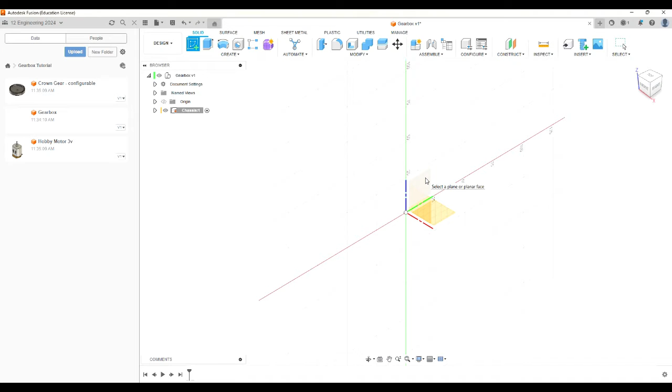Okay, I'm going to start by drawing a sketch. I'm going to draw the side wall that the axles go through. So by clicking on Create Sketch, I'm going to choose this plane here, that's the one that's going to have the side wall on it. And I'm going to start by drawing a sketch.

Now, I want to put the axle holes in, but I've got to know how to space them. So to do that, I'm going to use some construction lines. I'm going to create a circle - I can click on circle here, or C for circle, and I can put this any old place I like. And now what diameter?

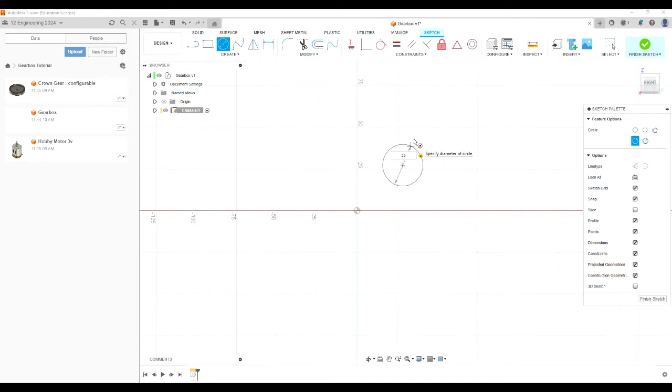The compound gears that I'm using have 50 teeth, and the modulus is 0.5. The 0.5 is the ratio between the number of teeth and the pitch diameter. So if I've got 50 teeth and 0.5 modulus, that means my pitch diameter will be 25 - that's 0.5 times 50, 25 millimeters. So that is the pitch diameter of the large wheel on my compound gear. Now that needs to mesh with another gear - it needs to mesh with the small gear on another compound gear.

And the small gear has got 10 teeth and it's still 0.5 modulus, so all of the gears that we're using have 0.5 modulus. So it's got 10 teeth, which means it's going to have a pitch diameter of 5 millimeters. So I'm going to type 5 as my diameter.

I'm going to zoom in and just grab that and move it out a little bit, just so it's a little easier to read. Now, that pitch diameter and that pitch diameter, they need to be touching. So I can come up here and use a constraint. I'm going to use a tangent constraint. If I click here and click here and here, that now connects those two circles.

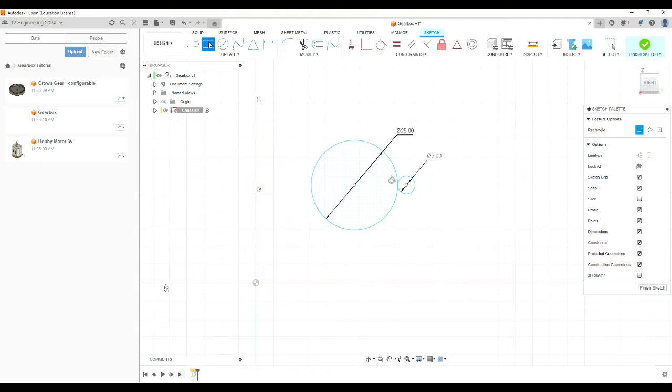Now I'm going to draw the actual rectangle. I'll click on the rectangle tool, and this will be the outline of the side of my box. So let's just draw a rectangle like that for now.

Now you notice all these lines I've drawn so far are blue, and blue means they're not fully constrained yet. So we're going to go about doing that. We're going to position these exactly where we want them. So let's think about some constraints.

I want this axle hole and this axle hole to be exactly horizontally aligned. They look like they already are, but I haven't actually constrained them that way. You might see if I grab this one, I can move it anywhere on the tangent of that one there, because that's the only constraint I put in.

So let's put a horizontal constraint between that circle's center and that center. If I come up here and click on that one... hang on, let me just escape or click somewhere else. Click on that constraint there, and I'm going to click in the center there and on the center of that, and now it's made them constrained horizontally. They're both at the same height.

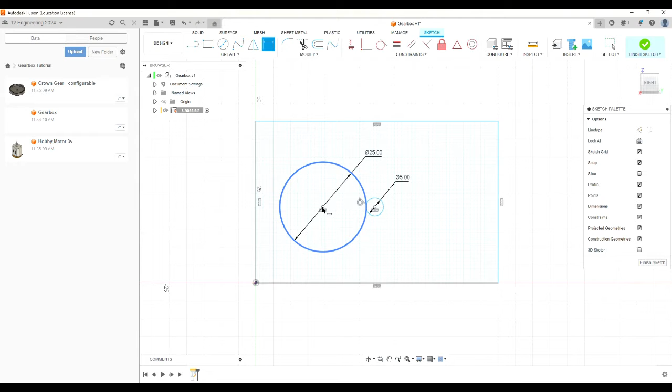Now escape, because I've finished with that function, and I can still move that around, so I need to fix it in space somehow. So I'm going to use a dimension. Click on dimension here, and escape, then click on dimension again, and click on that center there and that origin there. So I want that distance.

What do I reckon? Let's try a few things. What if I do 18? 18 looks pretty good. Might even go a bit smaller than that. What if I go 15? Because I don't want to use more plastic in my 3D print than necessary. So let's make it nice and compact.

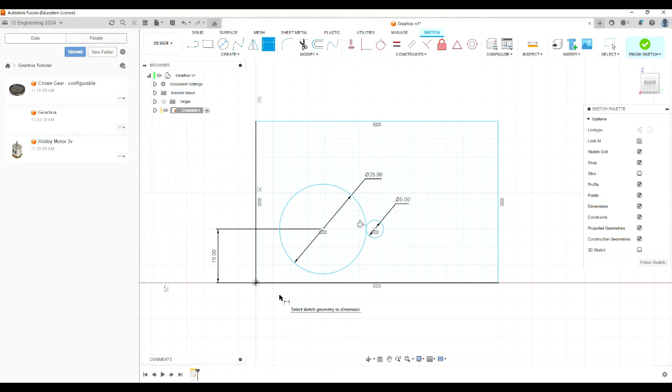Okay, I'm going to click from that origin there. See, I've still got my dimension active. You can see if I've ever got a tool active, I can escape to go back to just my select tool, and when I click on the tool, you can see when it's active by the cursor.

So from the origin there to the center of that point there, this time I'll come down here and do a horizontal constraint or a horizontal dimension. And what if I make that 15 as well? That looks pretty reasonable. Can you see now these have gone black? That's because they're fully constrained.

Now these lines over here, they're not fully constrained, but if I put some dimensions in - that's 70 at the moment, I'm thinking, what if I try 40? How does that look? Yeah, I can go even smaller than that, I think. Double click there, 35. Yeah, that'll do. Again, I don't want to use more plastic than I have to in my 3D printer.

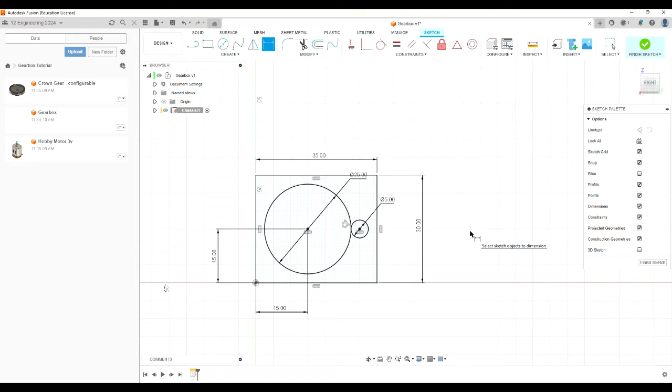Now I'm going to click on that line there and come out here, and I'm going to constrain that as well, or dimension that. I'm going to make that - what if I try 30? Yeah, I can go less than that actually. I can go 25. Good, okay. Now, because this side here can actually be smaller than that gear, it doesn't matter if the gear sticks out the top a little bit.

All right, escape. Now, another thing I'm going to do is these lines here, those two circles, they're really only construction lines. I'm not actually going to make anything from that circle, but I used the circle to help me do construction. So I'm going to click on that circle there, hold down Control and click on that circle, so they're both selected. I can come over here and turn them into construction lines by clicking there, or I can use X on my keyboard. Now you can see they're dotted, so they're construction lines, because I'm not actually going to make them into anything - I just use those lines to position my axle holes.

All right, so now I know where my axle holes need to go. They need to go there and there. Now what I'm going to do is, I could just go circle and create my axle hole.

Now, what's the diameter of my axle hole? My axles are 2 millimeters, but I need a little bit more than that because I want my axles to spin freely. Also, when I 3D print, holes usually end up a little bit smaller than you define them, because the plastic squishes out a little when printing. So the actual size is going to be a bit of trial and error. I think it's going to be about 2.3 millimeters, but I'm not sure.

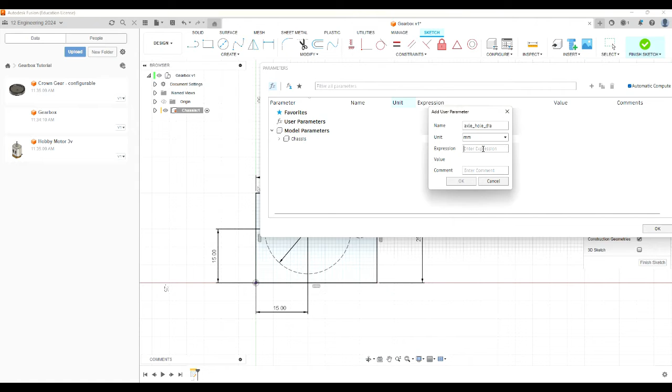I'm going to go okay there. I'm going to make all of my axle holes equal to that parameter, and by doing that, if I change that parameter once, all of my axle holes will change automatically, which would be really good. So anything you think you might have to change, with multiple instances of that measurement, a parameter is not a bad idea.

So I'm going to click on dimension, then click on the circle, and click out here. Hang on, I've got to delete the old dimension first. Okay, now put a new dimension in like that.

Instead of 2.3, I'm going to type axle, start typing axle hole diameter. There it is, I can see it. Click there once, hit enter, and there we go. So that axle hole now shows FX, which means it's calculated from the parameter.

All right, I'm going to do another circle. So C for circle. I want another circle here, and this one here, AX... yep, there we go, axle hole diameter, and click enter like that.

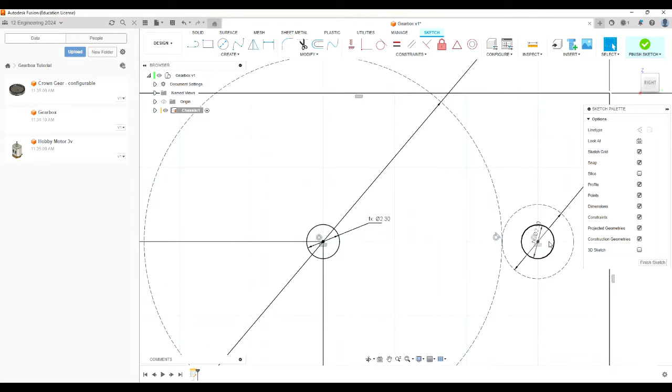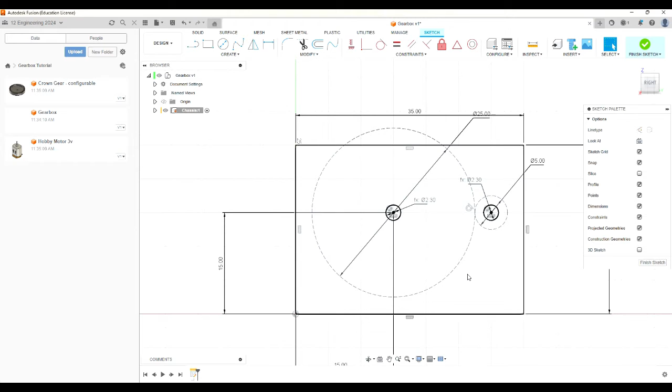Again, if I zoom right in, grab that dimension and move it somewhere so it's not so crowded in there. As I'm zooming, I'm using my mouse wheel, so if you've got a laptop, you can pinch on your trackpad, but it's much easier to use Fusion with a mouse with a wheel. By moving my cursor over here and zooming in or out, you can see I can easily move and zoom using the mouse wheel.

So if you haven't got one, get yourself a mouse with a wheel. You can also use this pan tool here, or pinch on your laptop. So you can do it with a laptop, but it's easier with a mouse. All right, escape to get back to our normal mode.

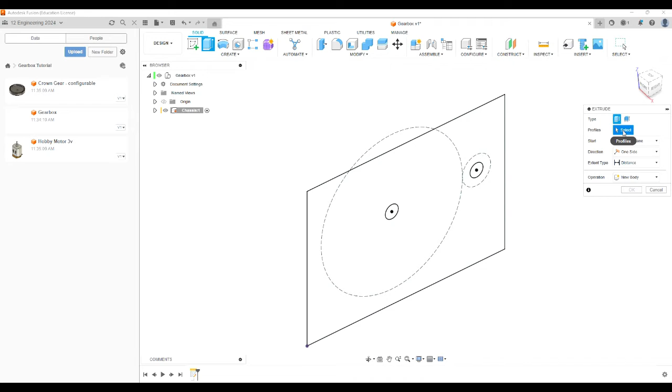Okay, that took a while, didn't it? Let's finish that sketch. Now I'm going to extrude it. If I come up to my view cube and view around, I can see that's just a two-dimensional sketch. I need to make that three-dimensional, so I'm going to use the extrude function, or just hit E on my keyboard. It's going to ask what profiles I want to extrude. Well, that profile there. I could actually select the holes, but I don't want to because I want to leave them as holes. So let me get rid of all that selection. Select that. That's all I want to do, okay?

And this arrow here, I can drag it, and you can see I can now turn that 2D sketch into a 3D shape. I want it to be 3 millimeters, so I could drag it, or better still, I could just type 3 millimeters into there, press enter, and there we go. That's created a 3D body.

If I come up here under chassis, and I open up the twisty there under bodies, that's the body that I just created. So my component is the chassis, and my chassis has one body.

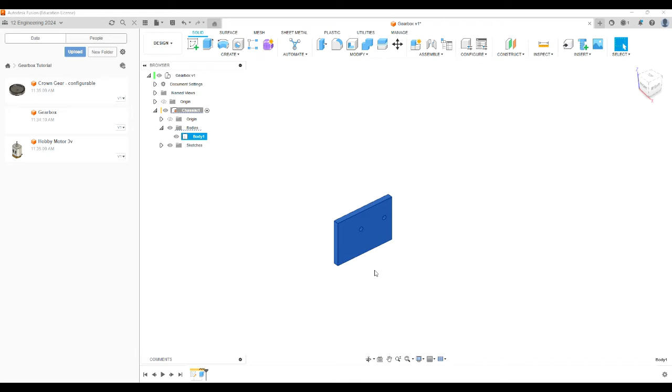What I want to do now is create another identical body over this side. So I'm going to use this move copy command, or M on the keyboard, and you've got to be careful what you're copying. I don't want to copy the whole component, I don't want another chassis, but I want another body inside my chassis. So I'm going to copy a body, making a copy rather than a move. If I didn't do that, it would just move it, but I want to create a copy.

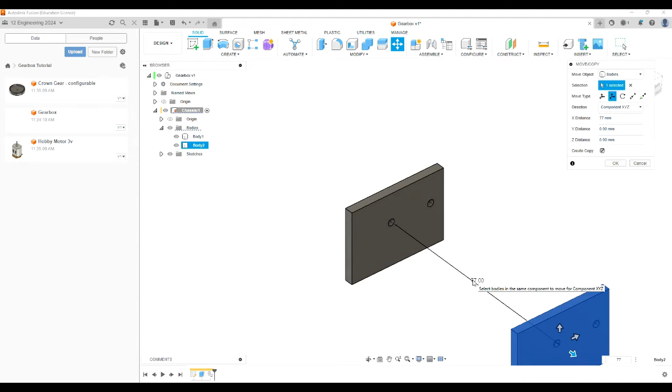There's different types of moves here. We're just going to use a translate move, and I'm going to grab that arrow there and move it. Now I want it 77 millimeters. The reason I want 77 is from that edge to that edge, if that's 77, then to that edge is 80, and I've got a 100 millimeter long axle. So I want 10 millimeters sticking out this side and 10 millimeters sticking out that side. So I'm going to go 77. Hit enter there, or OK.

Now you can see I've got two bodies. That's one body, that's another body. In a minute we'll join those bodies to make them one body again. In fact, let's do that now. So I'm going to grab my view cube and drag it round so I can see the bottom of those bodies.

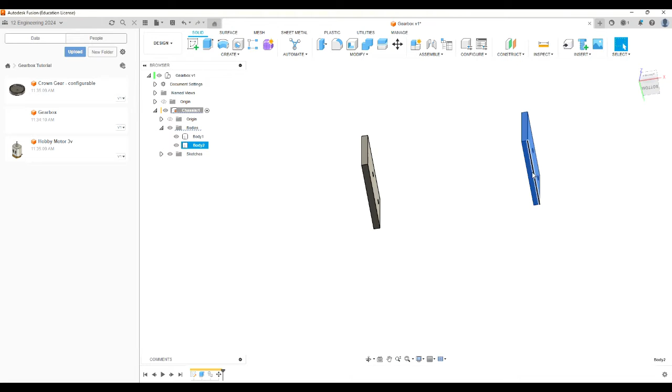And I'm going to start a sketch, and put a sketch on the bottom of one of those bodies, on that plane actually. So now I'm going to choose rectangle, or R on the keyboard, and draw a rectangle from that corner there to that corner there, like that. I could finish the sketch, but I'm just going to use E for extrude, and that will automatically finish the sketch and start the extrude.

Let's just drag a bit so I can see what's going on. This is looking up from the bottom. So what do I want to extrude? I want to extrude that profile there. And look at this, it's actually, for some reason I'm not sure why, divided that into two sections. So I want to extrude that, but I also want to extrude that, so I'm going to select that as well.

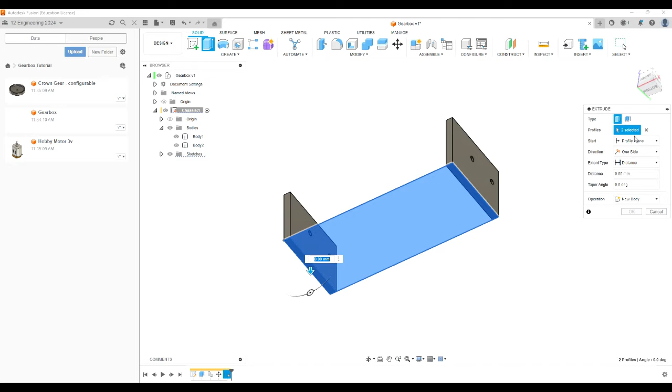So with both of those profiles selected, I'm going to drag that down by, oh yeah, that's right, that direction, again by 3 millimeters, because 3 millimeters is a pretty good width for a small 3D printed component. Alright, and look at that, now my bodies have been joined together.

Actually, let me just go back into that extrude. This is our timeline down here, so you can see all the steps I've taken. Let's double click on that last step, that extrude, and I can go back in just to make sure I did it correctly. I did, so it was an extrude. There's different extrudes - you can join things with an extrude, or cut holes with an extrude, or do intersections, or create new bodies. I don't want to create a new body, so join was the right thing. When you do that extrude, make sure it's a join.

So in that, because it's a join, it joined all those bodies together into one body. Alright, so there we go. About time to save, I think. Now, you know what, that's my start - that's the start of the chassis.

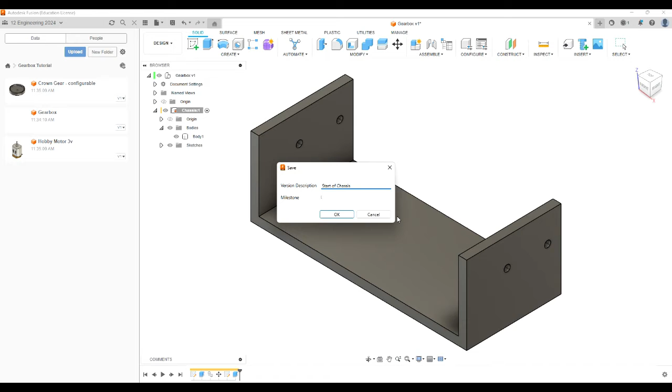So you can put a description on each save that you do, because you can actually go back. Fusion does version control automatically for you. So, start of chassis. If I click over here, once that's done, once it stops whizzing, if I click on V1 here, it will show me - I clicked too early, there we go. See, it gives me that's when I first created the item, there was nothing, this is this point here. So I can actually go back to any save point I want, and put little descriptions on my save points, which is pretty handy.

All right, let's create an axle. I'm going to come back up to Gearbox, up to my top level, because what I can do is create an axle component underneath the chassis component. I could nest it.

You might argue that's a good idea, but this is a fairly simple mechanism, so I'm going to keep all of my major components at the top level. That's why I activated the top level component - you can activate a component by clicking the circle next to it. If I activate the top level, then when I create a new component, it'll sit underneath Gearbox v2 at the same level as the chassis, not nested inside it.

So I'm going to create a new component here and call it an axle. I want two axles, but let's start with one, then I can copy it to make another. There's my axle component - it's automatically been activated, sitting at the same level side by side with chassis, not underneath chassis.

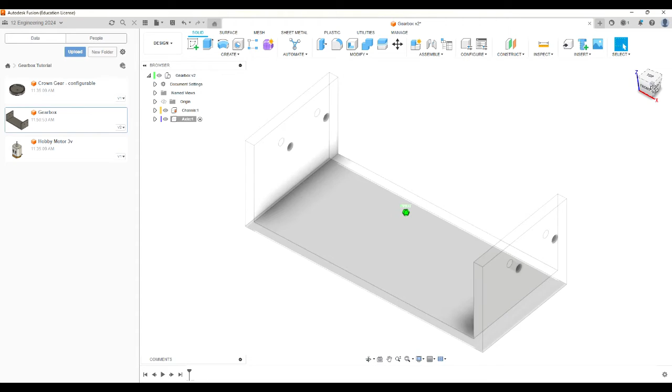I'm going to drag around to the side here and start my axle from there. I'll draw a sketch and create a circle. This circle needs to be 2 millimeters because my axle is 2 millimeters diameter, and you can see it's just smaller than my hole, which is good - that's what I want.

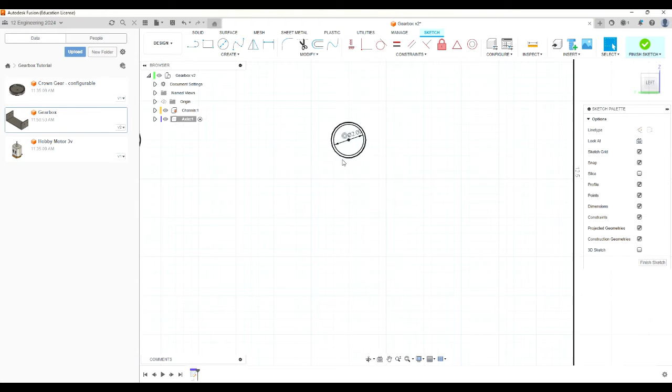Okay, I'm going to extrude that. E for extrude, click on that circle. Let's zoom out a bit so I can see what I'm doing.

Now, I want my extrusion to be 2 sides because I want to go back this way by 10 millimeters - see that 10 there? And I want to come out this way by 90 millimeters because my axles are 100 millimeters long - 10 millimeters out that side and 10 millimeters out the other side. My operation type is a new body, which is good because I want to put a body under my component.

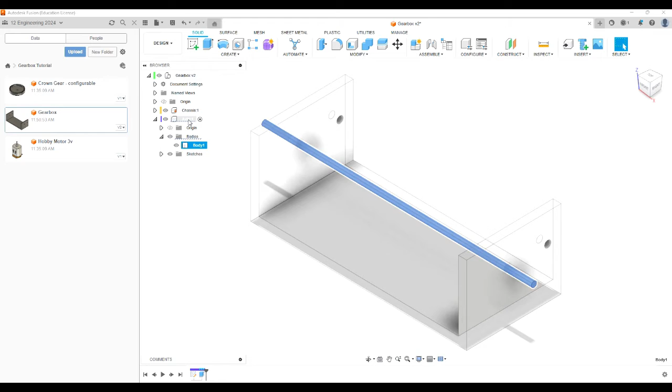So there's my axle now, and my axle has a body. I could name that axle if I wanted to, but I think just naming the components is going to be enough at this stage.

All right, now I want to copy that. When I copy it, I can't copy it if it's activated, so I need to come back up to the top level. Now I can copy that component. I'm going to click on the move copy command, or I could use M.

Last time I did a copy, I copied bodies - this time I want to copy components. I want to take that whole axle component and make another component. So I'm going to select that one, create a copy, and do a point-to-point move. Actually, once I've clicked point-to-point, I've got to go create copy again.

So point-to-point means I've got to take an origin point. Let's click select and select the center of that point there. And my target point, I want it to be there. So that's created a copy, and it's copied it there.

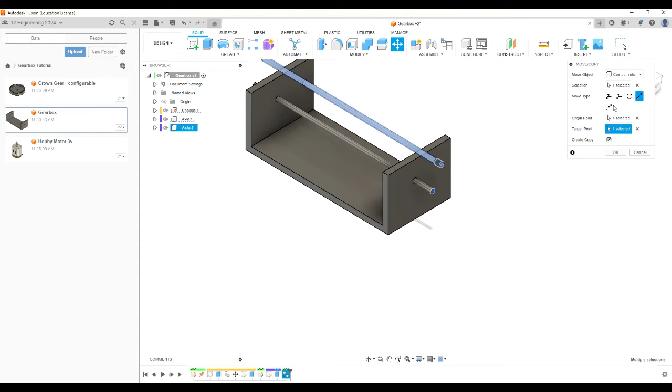Now, it's not quite right, is it? It's sort of been translated back. So I'm just going to finish by clicking translate, grab this arrow, and drag it back out there, 10 mils. I don't need to create copy again because I already created a copy when I did the point-to-point action - now I'm just translating the copy that's already been created, so I don't want another copy.

So now you can see I've got axle 1 and axle 2. They're actually the same design, but if I made a change, if I made this one longer, this one also would be longer because they're 2 separate instances of the same axle, which is pretty much what I want.

All right, so where are we? Okay, the next - actually, let's save it. Save, and let's call that axles in place.

Okay, now talking about axles in place, those axles now, I could actually move. Let's just Control Z because I don't want to do that. I actually want to put those in place. I want to join them. I want to create a joint between the axle and the chassis.

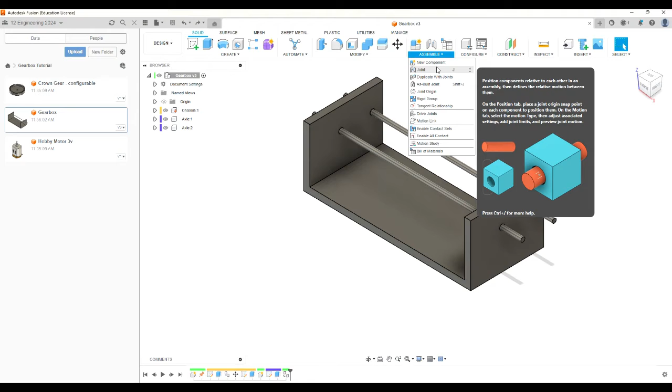Now the axles and the chassis are already in the correct position. So if we look at assemble here, there are 2 types of joints: a joint or an as-built joint. I'm going to use an as-built joint because they're already in the right position. If they weren't in the right position, I could use joint, and while I create it, I could have them move into place, but sometimes it's easier to just create them in place and use an as-built joint.

So if I look under assemble, as-built joint is Shift J and joint is just J. So I'm going to press Shift J to create an as-built joint. What you do is pick the component that's sort of like the minor, smaller component, because if we're doing an as-built joint, none of them will move. But if we were doing a normal joint, the object you click first will move to the object you click second. So I'm going to click that as my first, and I'm going to then choose that as my second.

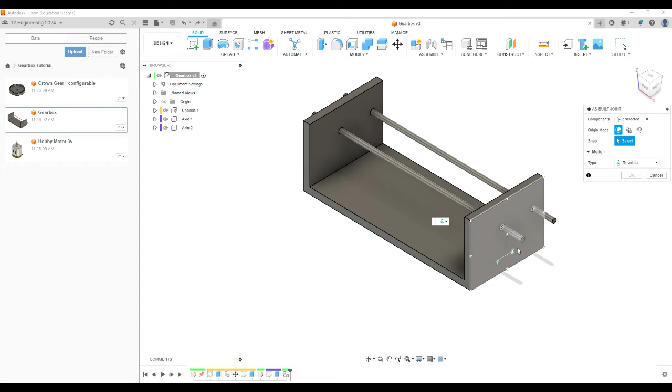And there's different types of joints. We could do a rigid joint, which would mean no motion at all, but I actually want a revolute joint because I want this axle to be able to rotate inside the joint. Which means I've got to select this. I've got to choose a snap position - in other words, what's the axis of rotation?

So I click on select there, let's zoom in, and I want to choose - be careful not to choose the edge - the center of that axle. Now you can see it's animating. It's showing me that if I click preview motion, you can't see it much because there's no features on the axle, but that axle can rotate inside the joint we've just created. So click OK there, and that's a joint - you can see that up here.

Joint there. All right, let's look at this one here. Let's do the same thing. We're going to go Shift J to create a joint. I want to join that axle to that chassis, so they're selected. I want it to be a revolute joint, and I need to select the axis of rotation, which is that one there, and then I can go OK, and I'm done.

So now they're joined. So now I can't grab and move those axles. They're in place, which is good, because if I move this chassis at some stage, or move some other components, these aren't going to go and play up on me. All right, let's see, what else do I need to do?

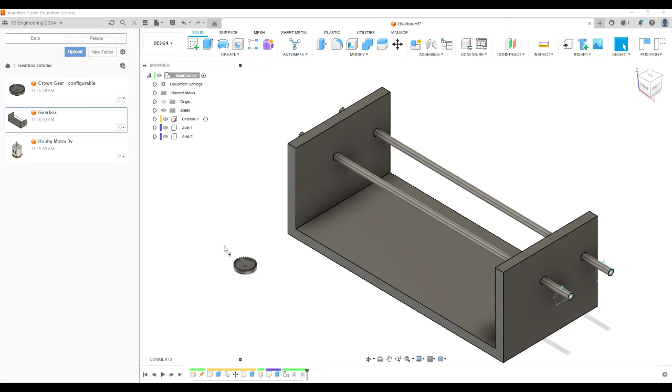Okay, what I want to do now is put my crown gear in place. So here's my crown gear. I'm just going to grab my crown gear and drag and drop it into my design, and it'll automatically put it at the origin of the design.

Now, actually, let me just Control Z. Let me show you, I needed to be careful of this. When I put my crown gear in, I want to have my top level design selected so that my crown gear as a component sits directly under the top level - on the same level as all of these guys. Now I'm just going to grab this and move it out here a bit so I can see it better. And I'm just going to go OK.

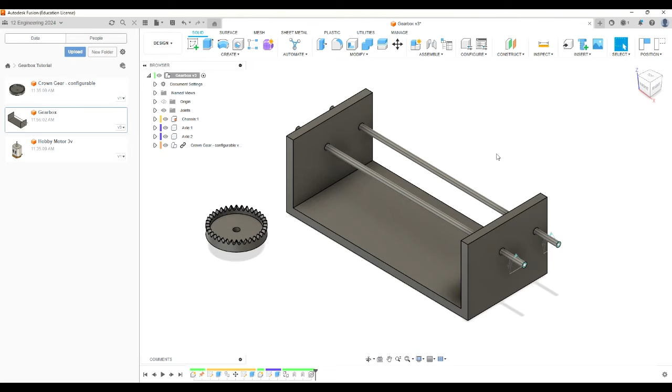Now, I want to put that crown gear onto that axle. So let's do a joint. I could move it there first and do an as-built joint, but let's just try doing a straight old joint. So again, with Gearbox selected up here, I want to now press J, and OK.

So component 1 - actually it gives me component 1 and component 2 now. So component 1 is this guy here, and in fact I'm just going to select that point there. Oh, actually, yeah, that's all right. Okay, let me show you again.

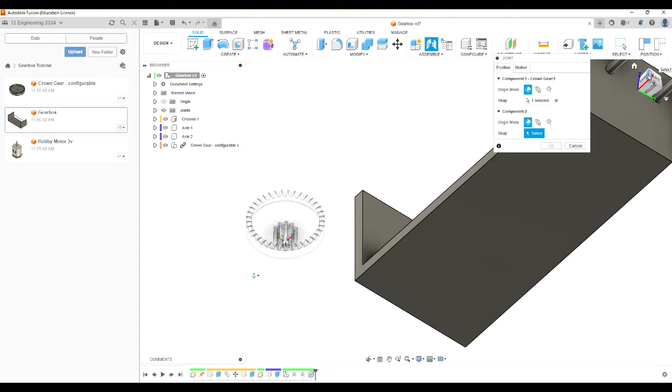So component 1, it's asking for my snap point. So when I select component 1, I'm going to say that center of that hole there is the bit I want to align with something. So I'm going to click there on that center hole, and for component 2, let me just move around a little bit. I want to snap that point there onto this axle here, like that.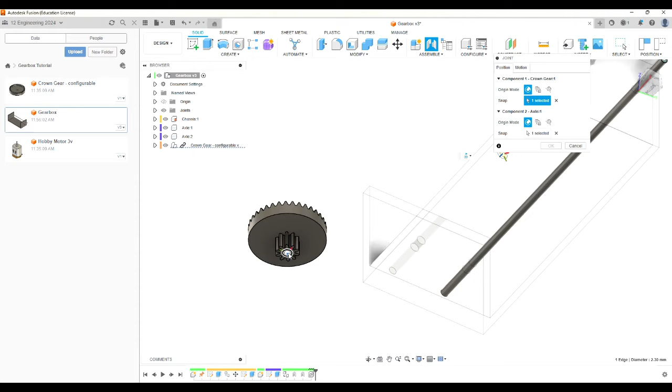Okay, and it wants this, let's see - oh no, it wants the snap point. See how that's white? Oh, actually that looks all right. Let me just do that again. Selected, snap point - there we go, that's got it. So now you can see it's come in here, and let me just have a look at the orientation.

Okay, that orientation is incorrect. I want those teeth on the other side, so I can use flip. It took a guess and got it wrong, so I click on flip and now it's right.

I can move this up this end a little bit. Now, what kind of joint? I want this to be a revolute joint as well. Okay, so that's good, I can go okay, and there we go. That's joined in there, and I can now rotate that by hand, just freely, anytime I want.

I'm going to just revert back to its original position. Okay, good. Let's save it again. Save. Let's call that crown gear in place.

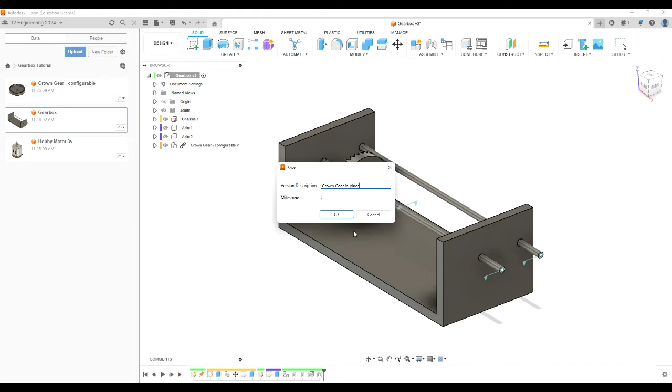Okay, now I'm ready to put my motor in. So let's do that. Now you've noticed I haven't put a mount for the motor yet. I'm going to build the mount around the motor. So let's get my motor and drag it in like that.

Again, it'll put it at the origin here, and I'm just going to move it out of the way so I can see it. Now, when I've got it in a spot that I can see it, the first thing I want to do is orient it correctly. So that's the bottom of my motor and that's the top with the terminals on it.

So the first thing I'm going to do is, see these circles? These circles allow you to rotate. So I'm going to grab this top one and rotate. Now I'm going to be careful about how many degrees I rotate it. So if I grab that and rotate to 90 degrees, you can see there it says 90 degrees. So that's good, the bottom's down now, so that's good.

Now I want that axle there facing this way, so I'm going to grab this handle here. I'm going to rotate it this way by 180 degrees, like that. Okay, and all right, that'll do me for now. Oh, actually, no, I'll keep going.

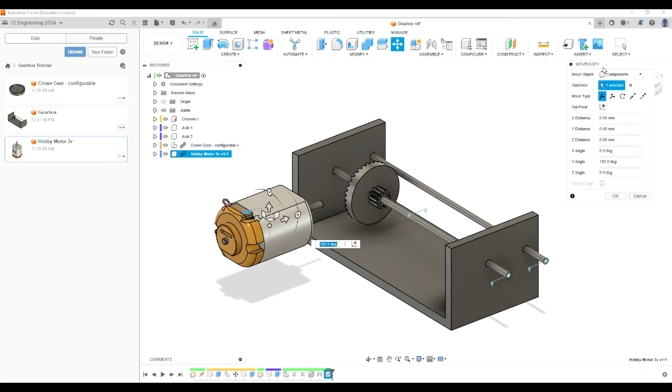I'll keep going. Now, what I also want is if I look at the height of the motor, it's not quite at the right height. I want that axle there to be aligned with that axle there. So what I'm going to do is a point-to-point move here.

So I'm going to select that center point there, that's my origin point, that center point there, like that. And that's in the way. And that center point there. I'm actually clicking on the outside of the circle to get the center point, but you can see it's got the center point, so that's good.

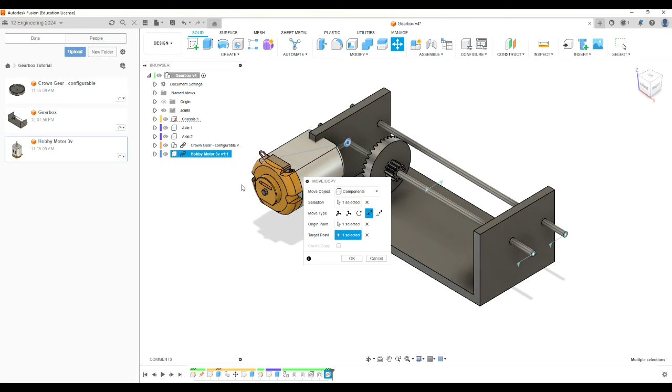All right, now you might think, oh, what did that do? That sort of that's aligned. Not so -- you can see now my orientation is correct, my height is correct. So the other bits to fix now are pretty easy.

I can move. Let's see. I'm going to do a translate. So I'm going to grab that there and move that across to here. Let's have a look at the top view, see what that looks like. Okay, and this needs to move back a bit. Now I want that to be about there.

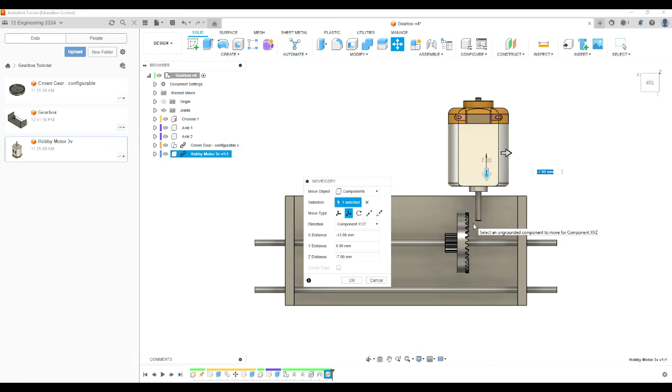Now you know what, I should have put the pinion on first and then I can see where it goes. So I'll just move this out here a little bit. I'm going to put the pinion on and then I'll know exactly where to put it. So we'll leave it there for now because that's lined up.

It's got the right orientation, it's got the right height. We'll just fix this other motion in a moment. So, okay, all right, let's do the pinion.

So I'm going to create a sketch. Well, actually, no, I can't -- I don't want to do a sketch. Ignore that. What I want to do is create a gear.

Now, to create a gear, I'm going to use a utility, an add-in. So utilities, add-ins, scripts and add-ins. I'm going to come down here and use this spur gear. I'm going to use this bottom one with the Python symbol and click on run. And this runs a little script that some helpful person has created, which will do all the hard work to create a gear for us.

So my pinion gear has 10 teeth. Let's see, the module is 0.5. Don't do .5 -- it'll give you errors and it'll still work, but just do 0.5 like that. That works better. It's metric, it's got a 20-degree pressure angle, that's good.

Backlash 0, that's okay for us. Root fillet, down here it's saying the center hole's too large, which makes sense. So let's fix the hole diameter. It needs to be 2 millimeters, because that's the width of the axle.

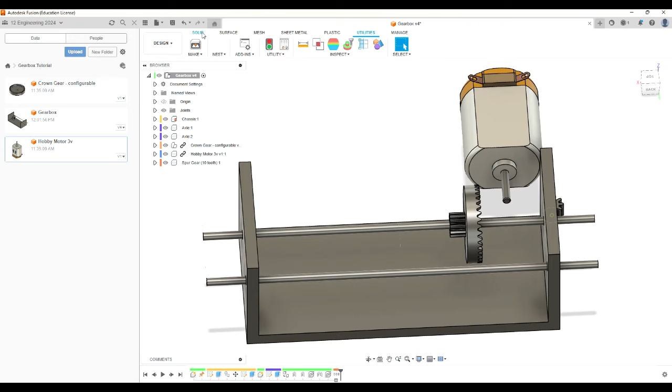So let's come back to solid and move copy. Let's just move it where I can see it. That one there. Oh, I don't want to move the body, I want to move the component. So that component there, let's move it out to here where we can see it.

Okay, now I want to join that to that. So let's do a J, and select that point there, and select that end there like that. There you go, that's put it in place. That looks pretty good. So I'm going to go OK there.

Okay, there's a joint, and it's done a revolute joint. It did revolute by default because we've been doing revolute joints.

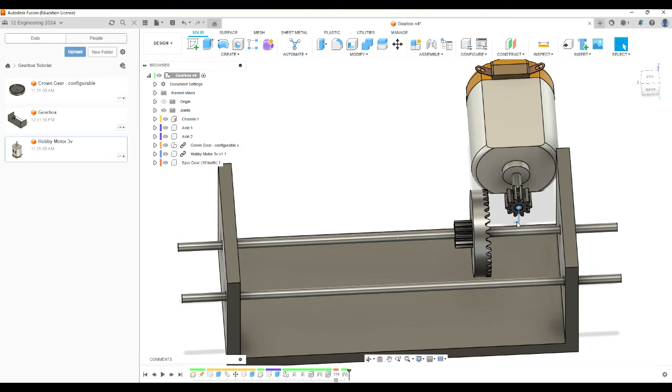All right, I'm going to take a top view here and let's move this motor into place. So moving the motor, I'm going to move it to there so it meshes nicely with that crown gear. My back and forth, I guessed that before, but that looks pretty good to me. That's about right.

So now that this is in the right position, I'm going to capture position. Capture position means this is its home position. If we ever accidentally move it, then we can revert it back to its home position. Okay, that's looking good. Let's save it again, and I'm going to call it motor in place.

Terrific. Now, of course, we need a bracket for the motor, but now that we've got everything lined up, can you see what I did was I built the things that need to be lined up together, and then I can build the other components around them.

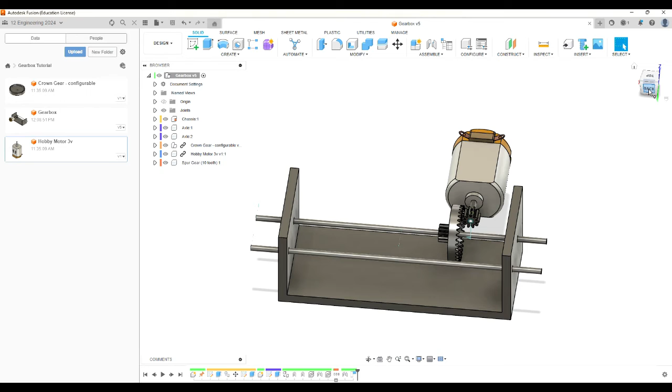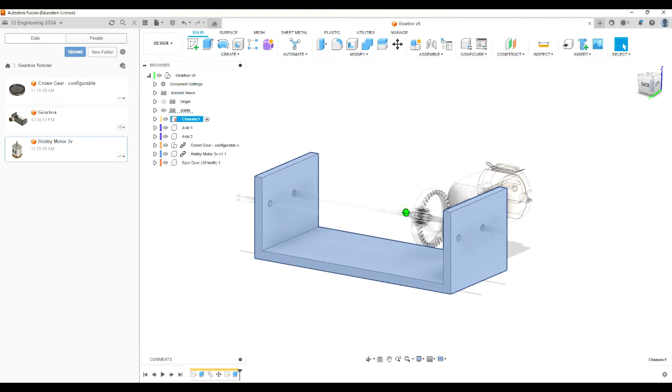So if I click like this, I want to continue to work on the chassis. At the moment this gearbox is selected. It's really easy to work on the wrong component, it'll let you do that. So I'm going to come down to chassis, because now I want to build a bracket. I want to extend the chassis so that it's got a bracket for the motor.

So what I'm going to do is isolate the chassis. Right click, and I've activated it already. Now I'm going to isolate it, so now all I can see is my chassis. But I also want to see my hobby motor, so I'm going to make that visible again. Excellent, that's what I want.

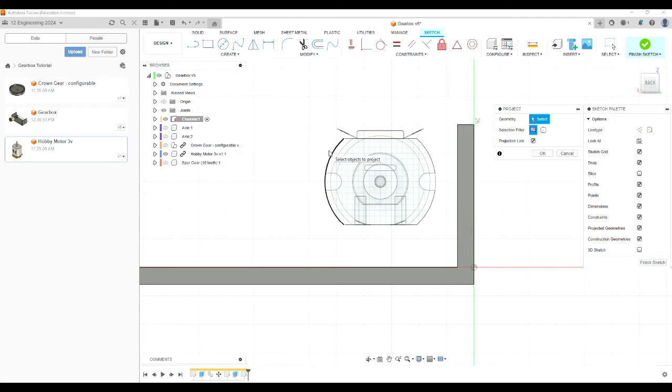Okay, now I want to create a sketch on the front of the motor there, like that. And I want to project some of the geometry of that motor into my sketch. So I'm going to do P for project geometry, and select some of that geometry. So I want that.

So that outline there, I want that in my sketch. I don't need the top one. I'm also going to need the bottom one there, so I want to project all of those. If I go OK, and now hide the motor, you can see I've got the outline of the motor, those important points, and the bottom line there also, because I'm going to need them to complete my sketch. So I've projected those into my sketch.

Let's just turn the motor back on. We probably don't need it, but let's turn it back on. All right, now I'm going to do some drawing of my bracket, using the offset tool. I could use O or click on offset here, and I'm going to click on those lines like that, that, and that. This has created a 1mm offset. I'm going to change that to a 3mm offset.

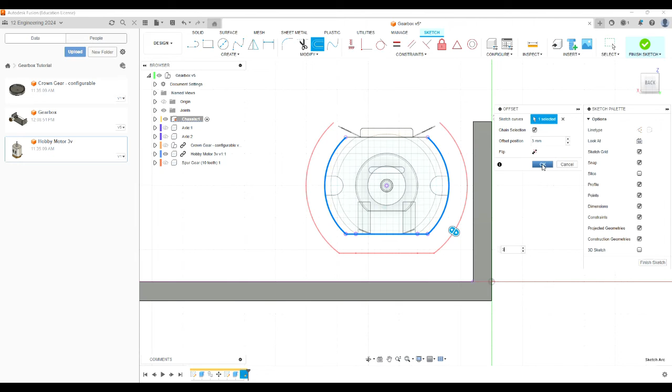And I'll click OK there. Okay, good. Now I need another line. I just need to, you'll see how this comes together.

I want a horizontal line across here. I'm going to hover over that point there, and by hovering, I've told Fusion that that's an important point. So now when I come over here, Fusion will help me align my starting point with that height. I click here, and now I can come all the way across to here. In fact, let's come all the way across to here like that. Okay, and escape. So that's created the top line for my bracket.

And if I want to be pedantic, I could trim it. I could trim that edge there and trim that edge there. Didn't need to do that.

Well, it's blue, so I'm going to dimension. I'm going to put a dimension between there and there. I'm just going to leave it, I'm not going to change the dimension. Press enter. Now, because I've put that dimension in there, that line is fixed, which is good.

Now I want a rectangle underneath it, between there, and I'm going to hover over this point here so I can come down and finish my rectangle on that line. That's the reason I projected that line down the bottom, so that it would snap to it.

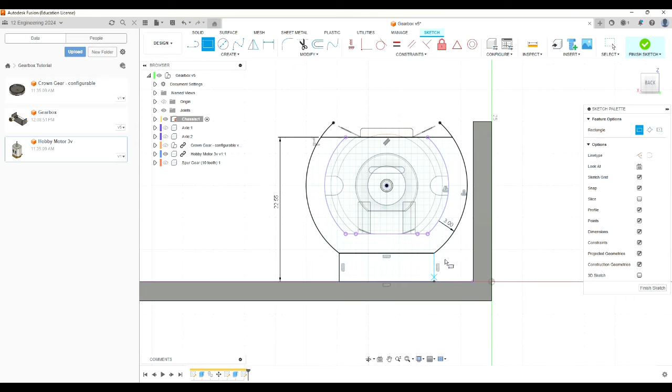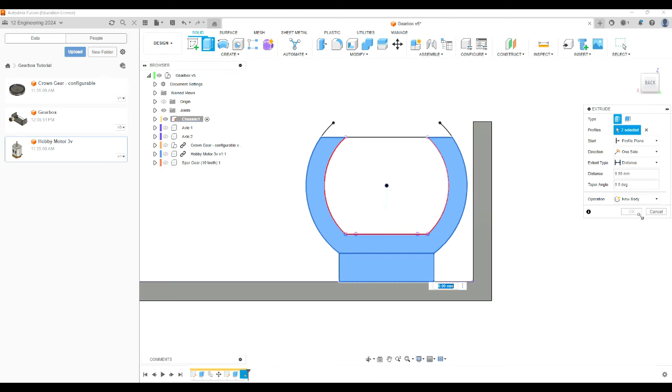Okay, like that. Now I'm ready to extrude. So I press E for extrude, and I want to extrude that section there and that section there. And now, if I hide my hobby motor, you can see that those parts are now in my sketch.

I want this to be a new body. So how far do I want to extrude? Let's use my view cube so I can see what's going on here. Pull that back. Actually, let's put the motor back on so I can see the motor. How far do I want to come back?

I'm going to come to 19 millimeters. You know why? Because the front of my motor is curved, so I actually want to start my bracket back a little bit. So if I come up here, I want the start of my extrusion not to be the profile plane, but an offset.

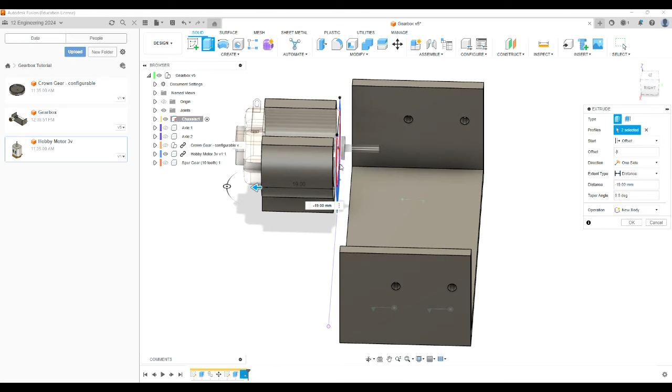See where that is at the moment. If I put an offset of 1, oh, it's gone forward. Okay, I'll make it -1. So that starts my bracket just a little bit back, and it's 19 millimeters long, so it's going to be... that's nice. Okay, I'll go okay, and there's my bracket.

So now if I come back, if I unisolate my chassis so I can see everything, unisolate, and activate my top level component, I can see what I've built so far. Okay, there's my bracket. Now my bracket's floating in space.

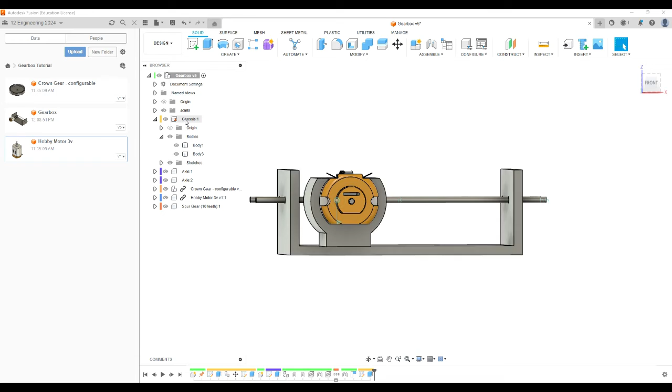So all I need to do now is create another extrusion down the bottom here, which will join all of that together. You can see my chassis at the moment has got 2 bodies in it, that body and that body. So again, now I want to work on my chassis, so I'm activating my chassis.

Don't forget that. I'm going to create a sketch, using the bottom of this section here. Let's do a sketch, use a rectangle from that point there to, I don't know, let's go about here. In fact, it's 3 millimeters deep, which is already correct. If I go tab, I can change that other dimension. I'm going to make that 35, like that, then hit enter, and that's created a little rectangle there.

Now I'm going to extrude that rectangle. So E for extrude, just so I can see what's going on, move it around a bit. That's the profile I want to extrude. Let's drag it out. Now I could line that up by eye, or instead of doing a distance, we're going to extrude it to an object. I'm going to click on that face there, and that'll automatically line it up.

Okay, and it's a join. I don't want a new body or a new component, I want it to be a join. Now it's joined all that together. You can see now my chassis is back to having 1 body. All right, so that's looking pretty good, I think.

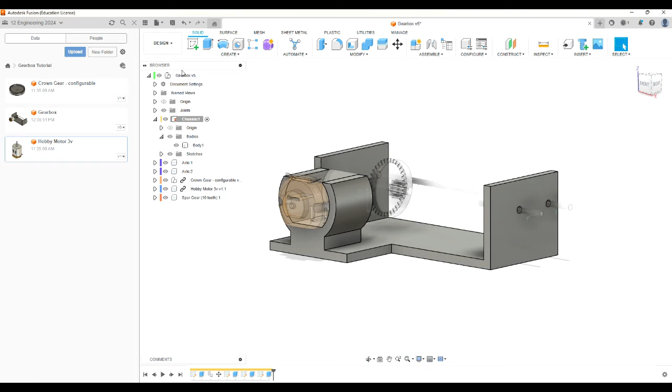All right, so my chassis now is ready to 3D print. Actually, we can tidy it up a little bit first. I'm going to put some fillets on the corners. Fillets look good, but they'll also make your object stronger.

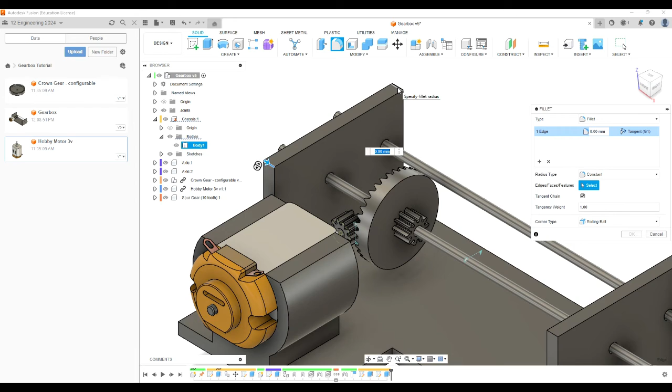Let's do these ones first. I just clicked on the fillet tool, and I'm going to click on that edge there. You might want to zoom in on it. So all these corners that I want to be round instead of sharp, I'm going to do. Let's come into this one here, and maybe that one, and that one, and why not this one too. Let's make them all 5.

Yeah, 5 looks pretty good. I like that. Let's have a look around the place. Oh, I should have done that one as well. Never mind, what I can do is click plus, add that one there, and make that one 5 as well.

That looks good. Actually, I don't want to do OK yet, I'm going to click plus and do some more fillets. This one here, that corner there.

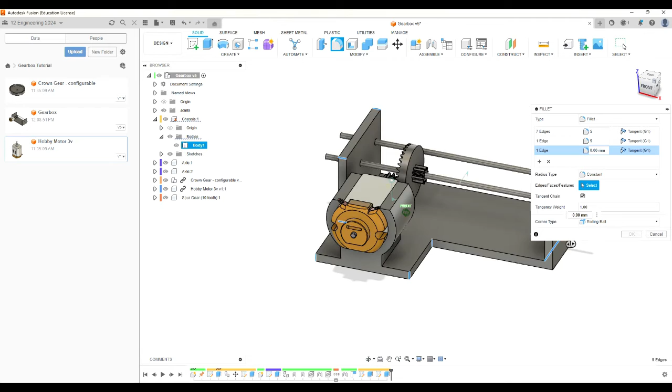Now these ones here will actually be stronger if I put a fillet in. I'm going to put about a 3 millimeter fillet in there, and let's do these ones here as well.

Plus, so that one there and that one there. And let's go around the other side, and do that one there and that one there. Let's see what 3 millimeters looks like there. That looks pretty reasonable, doesn't it? Yeah, that's pretty nice. OK.

All right, so now if I come home, my chassis is ready for 3D printing. So let's save. Chassis ready to print. Good.

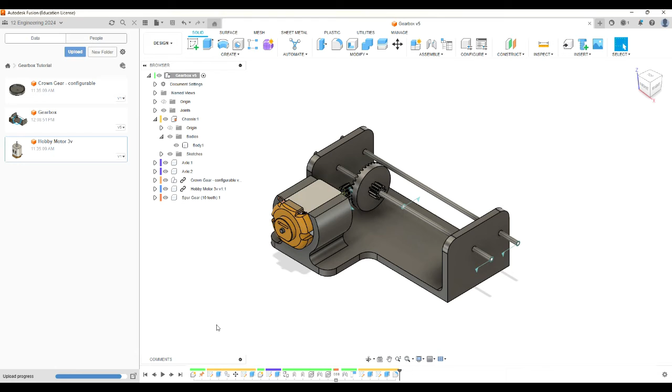All right, now we're going to do the compound gears. We're going to put the compound gears on here, so we've got to create a compound gear. Again, making sure that my top level component is selected, I'm not going to create a new component myself - the script will create a component for us.

So I'm going to go to Utilities, Add-ins, Scripts and Add-ins, and come down to the spur gear, the bottom one, the Python one, not the C++ one, and run it. Okay, it's remembered the settings from last time, so they're all good. Number of teeth - my compound gear has 50 teeth, so I'm going to put 50 there.

Again, because I'm not actually 3D printing this, you couldn't actually print a 0.5 modulus gear with a normal 3D printer - it's not fine enough granularity. If I'm going to 3D print gears, I'll usually use a modulus 2. So I don't care too much about all these little details.

Thickness, I do care about that. The gears I'm trying to model are 4 millimeters thick, and the hole diameter is 2 millimeters. Again, it'll be 2.05 if it's a B gear, and 1.95 if it's an A gear, a tight fitting gear, but I'm just going to leave them all as 2. Because I don't have to 3D print these, I'm just modeling them so that they appear right in the model.

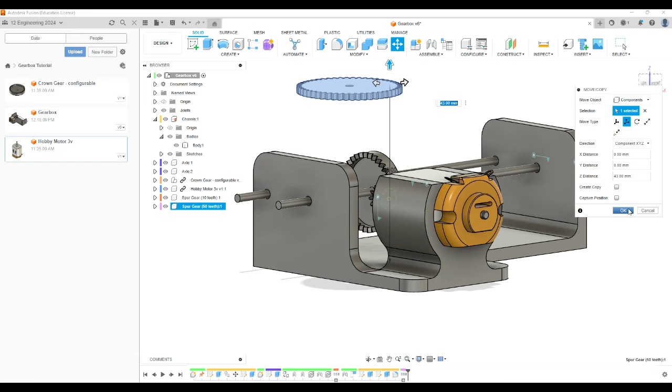Okay, and that should create us - there we go, it put it at the axis again, which is what it always does. All right, so now let's just move that so I can see what's going on. Let's go solid, move, click on that object there, move the whole component - that's good. I'm going to move that up here. Don't want to capture the position yet because it's not in its final position.

Okay, now that's just a normal gear, that's a spur gear. I want to make a compound gear. So you know what I'm going to do? I'm going to make that there.

Actually, I'm going to start to rename a few things here. That was my motor pinion there, that's that gear there. So let's call that the motor pinion.

So let's name that. Crown gear, that's pretty good. Spur gear, okay, that's pretty reasonable. Eventually we'll name that as the compound gear.

I'm going to select that and highlight it because I want to put my next gear sort of inside that, since they're going to become one part. So let's go Utilities, Add-ins, Scripts and Add-ins, and come down to spur gear again.

This time I want a 10 tooth, so the small gear on my compound gear has got 10 teeth, and let me just measure that. I did measure it before, but I can't remember. I think it might also be 4 millimeters. My trusty vernier caliper says 4 millimeters, so it's got to be 4 millimeters thick.

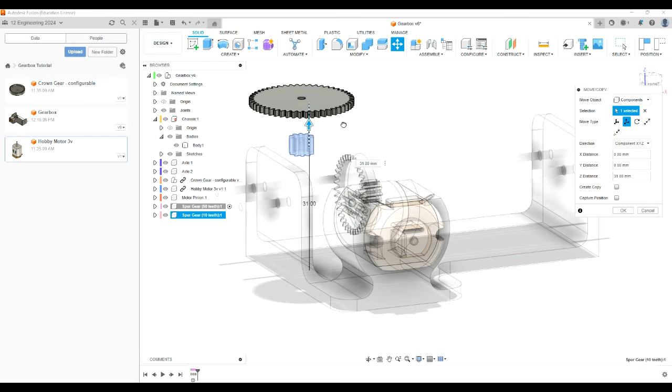Now we need to sort of connect these two together, don't we? So I want to do a join. If I'm going to join those two, I'm going to come up here to the top level and do J for join. I think I want to join it, it's coming underneath that one, to the top of that one there, like that.

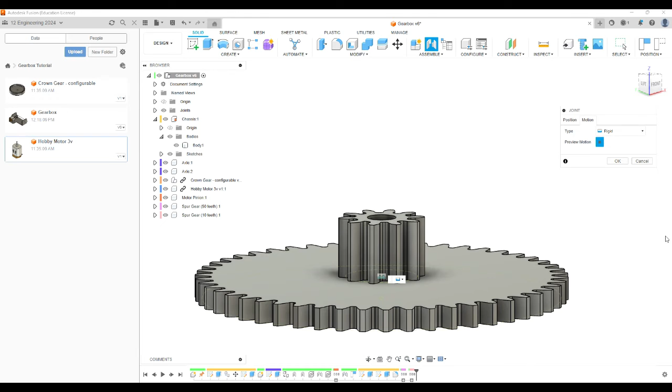Okay, that's got it. Now that's not a revolute joint, I want that to be fixed, so rigid. You like how it animates rigid like that? So they're stuck together, which is good because they're actually one body. All right, good, that'll do us. If we wanted to be really pedantic, there's a little ridge that goes under there, but I'm not going to worry about that. So there's our compound gear.

And in fact, what we could do at the moment, you can see it's put them on the same level. So I'm going to grab that spur gear there and put it inside that one there. Oh, you know what, I'm going to capture position. Not too worried about that, we're going to move it again anyway later. Okay, so I've put that inside, so now we have the small gear is inside the big gear because I want them to sort of appear as one.

But I also want to merge those bodies, so that body there and that body there, I want to merge them. Let's just select there and there, holding down Control, select both of those bodies. And I want to use this combine, so if I click on combine, target body, tool body, they're already selected because I selected them beforehand.

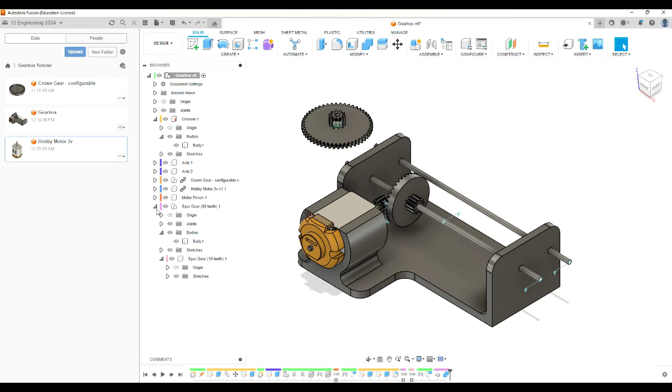I want to join them. I don't want to make a new component, and I don't want to keep the tools. Keep the tools means I'd be left with the originals and the combined, so I'd have 2 copies of everything. I don't want to do that, so I'm going to click OK. Now you can see under all of this, there's just the one body there, there's no body under this one here. That's good.

We're nearly there. Now all we've got to do is create multiple copies of them and join them onto there. So let's do some copies, let's do create copy. There's one, and let's create another copy. There's another one. How many of these we need? 1, 2, 3, 4, I want to do 5 of these. Okay, another copy. There's probably an easier way of doing this actually, but never mind.

This will work. Oh, that was wrong. Okay, create a copy, make sure I'm copying the whole components, not just the bodies. Oh, did I just? Yeah, I just created another copy. Another copy, create a copy. Let's put that one over there. Good, okay, so I've got all the gears that I need, you can see it's put them all here. Now again, that's multiple instances.

So if I make a change, for instance, let's just rename this. Instead of calling it spur gear, let's call it, well, it's going to be 50 teeth, 10 teeth, 50, 10, 2 is the axle diameter, and let's just say B for loose fit.

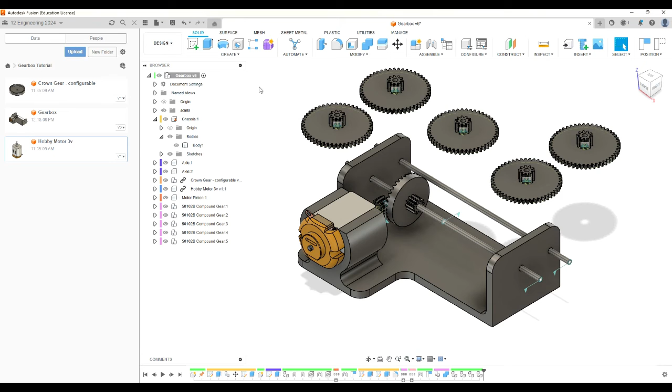Compound gear. Okay, so when I change that name, see they all changed because they're all actually the same component, they're just different instances, but we're going to put them in different places. So there's a whole bunch of joins here. I'm going to make sure my gearbox, my top level component, is selected.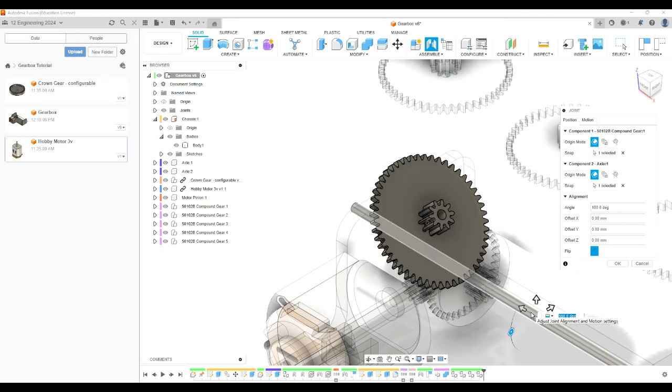I'm going to use J for a joint and start joining stuff up. So I guess my first gear, well, I'll put some gears here. That top section there, I want to connect that to that axle like that. Let me zoom out a little, zoom in a bit so I've got more granularity in my move. Let's put it there. Okay, and we'll do the same for the others.

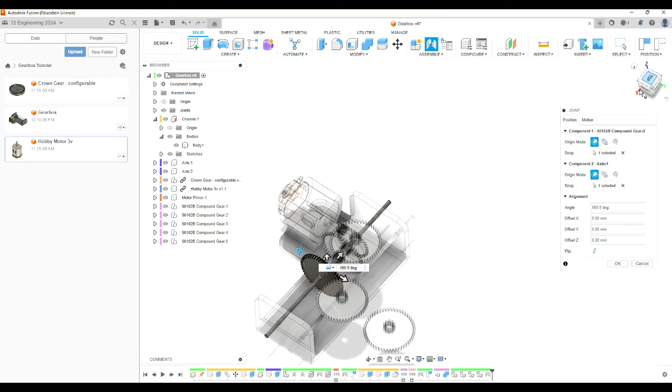In the video I might make this fast motion. Let's do another one. J, that one there, on that one there. There it goes. Oh, that's gone the wrong way, so I'll flip it. Okay, and I'll look from top view, and oh no, it was the right way, so I'll flip it again. Okay, good. Now zooming in, I'm going to move it back to about there and click okay. All right, next one.

Actually, that's 3 on this axle. Now I need the 3 on the other axle. So J again to create another joint. Oh, you know what I've done? Hang on, I'll fix this in a minute. I've created these joints the wrong kind.

So I'm going to double click on them. Oh no, I'm going to come back in my timeline here. They're the joints I just created. So that joint there, if I double click on it, I'm going to change the motion. I don't want it to be rigid, I want it to be revolute.

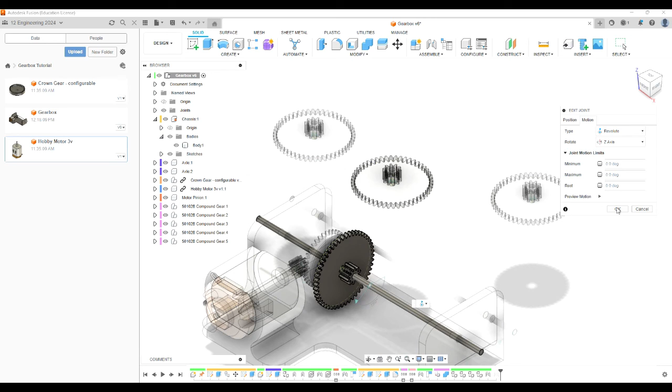Okay, good. Same with this one here. If I come back to this one, double click, motion, I want that to be revolute as well. There's a rigid one in there. What's that? Oh, that's the rigid joint between... yeah, there's a rigid joint in there. But the joints between my gears, my compound gears, and my axles need to be revolute joints, so I think I got that right.

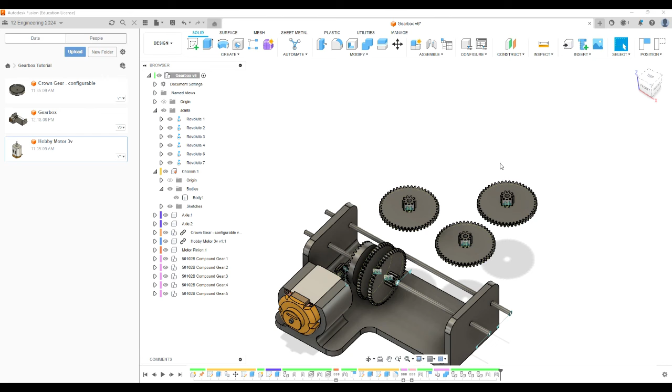Let's just check the joints. Revolute - compound gear and axle is revolute. Compound gear and axle, that's good. Okay, so I can see my revolute joints and they're all good. All right, so let's continue with these joints here.

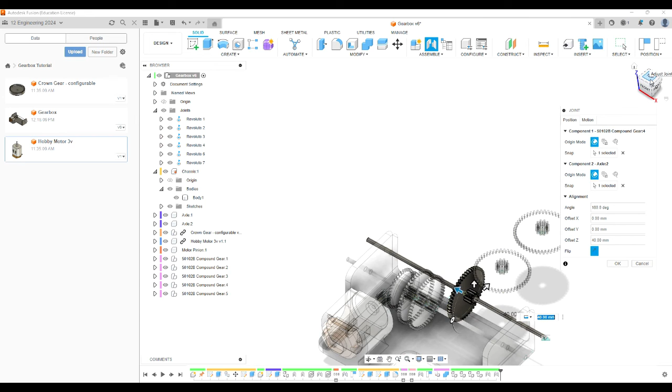So J, I want that there to be lined up with that axle there. And what have I done there? Let's try again. Okay, oh, it's decided to put it all the way over here this time. So I'll grab that and move it in. Let's go from the top view. Okay, that orientation is correct, so I don't need to flip it. And that one will come into here. If only it was this easy to assemble them in real life.

Okay, did I do another? I made another rigid joint. Never mind, I can double click on the joint here, or right click and edit the joint. That needed to be revolute again. Okay, good, okay, we're almost there.

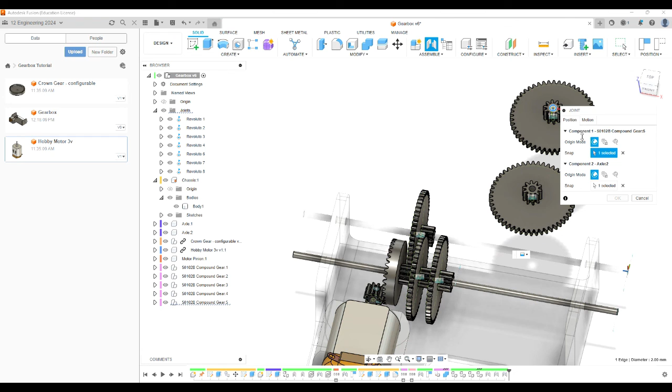Okay, J again. J there, and onto that one there. Sometimes that doesn't work, I don't know why. Let's try that again. J, that, and that, there. Okay, that's worked. I'm not sure why it needs 3 clicks - if you work it out, you might be able to tell me.

That needs to be flipped. Oh no, it doesn't, that was already correct. So again, from the top view, I'll come in and line that up. Zoom in a bit further so I get a bit more granularity with my moving. Okay, good, all right, we're nearly there.

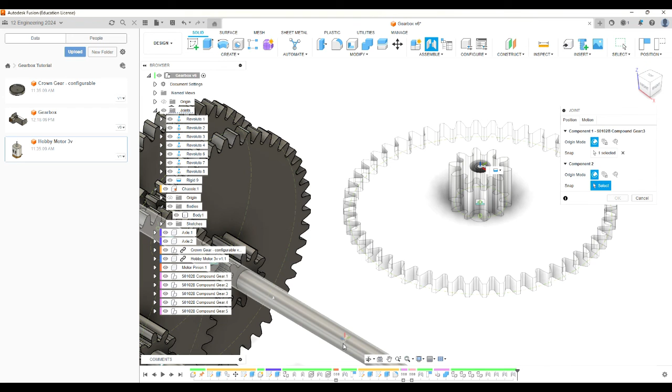This one here, that's okay, J, and that one there, that one there. Let's try again there. Okay, and I did another rigid joint - revolute - and let's move it back to there. Top view, zoom in. Okay, that looks good.

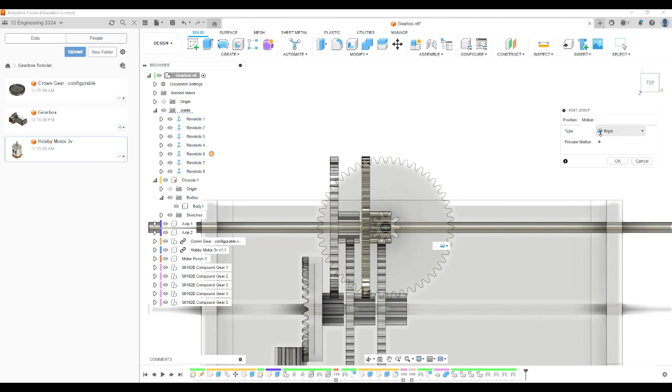I think the only thing I did - yeah, I've still got one joint that I did rigid, so let me edit that joint there. Let's go okay here first. Edit that joint there, and that should be a revolute joint. Okay, so there we go. I think we're done. Oh hey, let's save it. I'm going to show you one more thing. Save. Let's see. Gears in place.

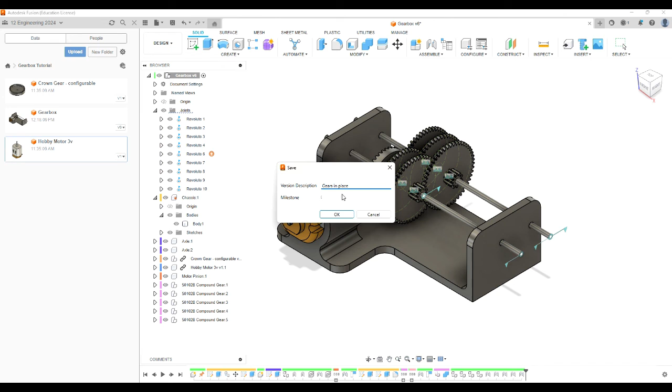All right, only one more thing I'm going to do, and that is just tidy a few things up. See how my joints are all visible? So I'm going to come over here and fix that a little bit. I'm going to hide my joints like that, don't really want to see them. Or there are some other joints in there as well, so I've probably got some joints, maybe under the chassis level.

No? There are joints in here. Okay, so I'll just turn those joints off. Did that turn them all off? Yes it did, good. There's still more joints somewhere, let me see if I can find them.

I know there are some sketches that are visible, so let's come in here and turn those sketches off. Good, and turn those off too. I've got another sketch there, so I'm just turning the visibility off. That pinion gear, the motor pinion, seems to have a sketch visible. Okay, I think that's good. I've hidden everything I need to hide.

All right, let's just change the appearance. So press A for appearance on your keyboard, and now I can start to change the appearance of some of this stuff.

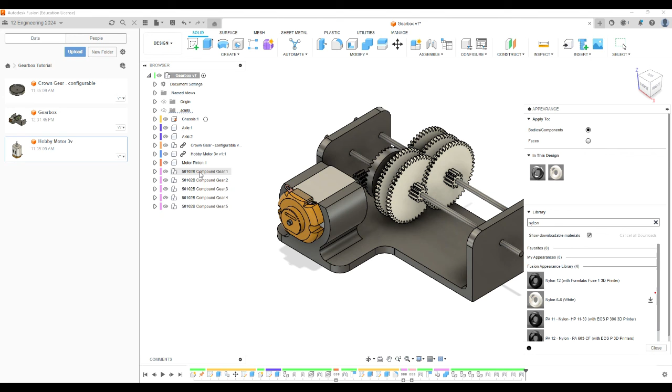My gears are actually nylon gears, so I'm going to look for nylon. There it is, white nylon. I'm going to put nylon up here in my palette, then drag it onto my gears. Notice I put it on one, but if one's made of nylon, the whole lot are, because they're the same component, just multiple instances. My crown gear is nylon, and my pinion gear is nylon.

Now what else? These are stainless steel, so let's see if we can find stainless steel. There we go, polished stainless steel, that'll do. I'll drag that up here so I want them to be polished stainless steel, and it's done them both.

Fantastic. Now my motor - the guy I got my motor from has already put color on his, so I'll just leave that as is.

Now this guy here, you know what, I'm going to make it out of PLA. But is there PLA? There's no PLA. But, oh, is there? Plastic - there's all sorts of plastics and stuff. Well, let's just use a plastic. Grey. You know what, I'm going to use ABS, that's what I usually do. I use ABS because it looks like PLA. They're both 3D printing plastics, but it's not white.

At the moment my 3D printer's got blue in it, so I'm going to right click and edit that. I'm going to change the color, make it about like that. Done. Okay, so I'm going to make that blue. So there we go.

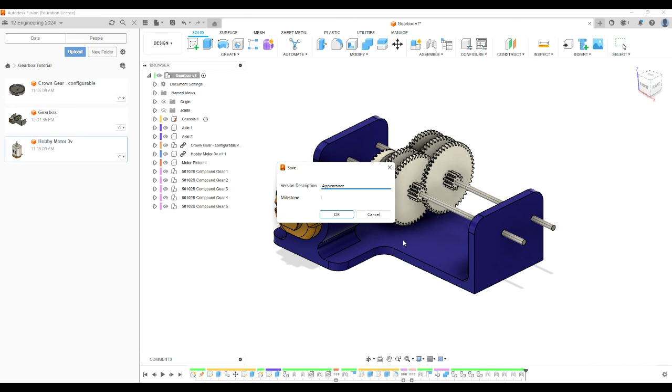So that's a pretty good representation, a pretty good technical model of our gearbox, and we can 3D print it. Let me just save that. I'm going to say that's... actually I shouldn't say finished, I should just say appearance done. I'm not going to say finished because I might add some more stuff onto it later, I don't know, so I never say it's finished.

One more thing, how to 3D print. To 3D print, we come to Utilities and go Make, 3D Print. We're going to use the STL format, STL binary - that's usually what you do. Select - now you're going to 3D print an object, or a body, so the body we're going to 3D print, I think we can just select like that.

So we can select it there, or we could come into - see the dotted lines there? That means what I've selected, and it helps me find it in the tree. Bodies, there it is. So if I get rid of that selection, I could have selected it here as well.

In fact, while I'm here, let me just change that - I'm going to call that the chassis body, so just put it chassis. So the component's called a chassis and the body's called a chassis. Oh, I didn't like that, did it? Let me change that again - chassis. Okay, all right, and sorry, I accidentally closed it.

So let's go to Make again, 3D Print, select the chassis like that. Now there's two things you can do - if you've got your slicer installed on your computer, which I have, you can click that and it will automatically open Cura and put the body into the slicer. But probably at school you won't have the printer installed, so just untick that box, click OK, and because the body was called chassis, the file is now called chassis, it's going to create a chassis.stl file.

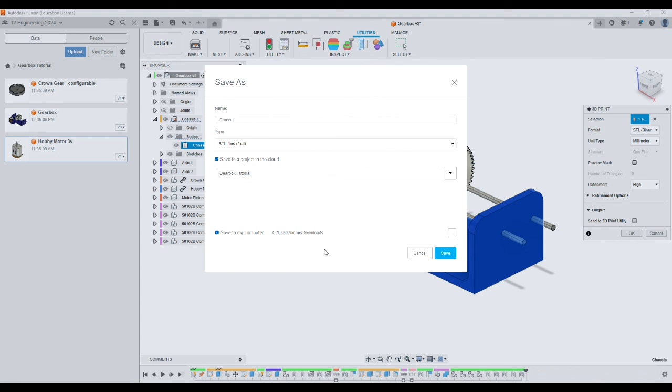And it's going to put it - if you click save to my computer, like that, you can browse and put it wherever you want. Mine's going in downloads. Export it to an STL file, it will do that, and you can take that to your slicer, slice it, and 3D print it.

All right, that was a long video, but I think it was worthwhile. Hopefully it's useful. That's the end.